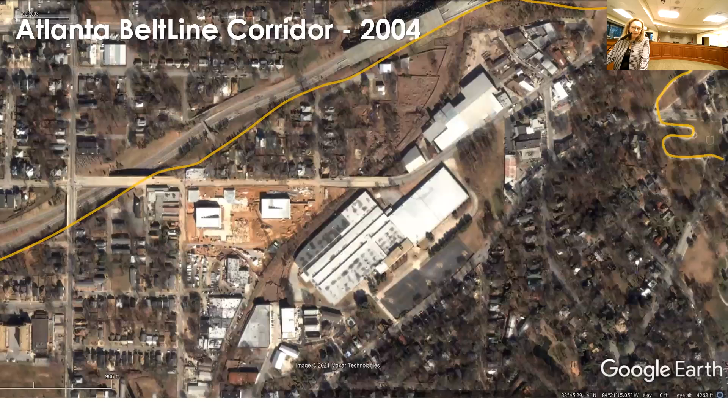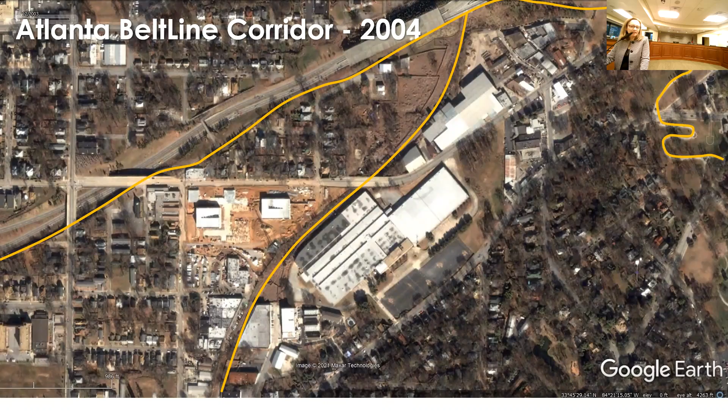Looking at the Atlanta Beltline's economic impact is a great example of what trails can bring. This is what it looked like in 2004, showing the existing trail to Stone Mountain, the Freedom Park portion of the Stone Mountain Trail, which was where the Beltline corridor was. Over time, the rundown areas became revitalized, bringing in needed tree canopy and becoming a linear park condition with destinations where people want to live, work, and play.

So that's a little bit of what the benefits are, providing the opportunity for public health, improving public health, getting out and exercising, biking, and walking.

One of the things we look at when building trails is we're building it for everyone's enjoyment - all ages, all races, all income levels, and all abilities. We really want everyone to be able to come and enjoy the trails that are going to be built here in Dunwoody.

And to also provide for those looking at it from a commuter perspective, especially with e-bikes now - how do we get you to the places you want to go, and how can you get there with ease from your home to those destinations?

As we started the plan here, our planning approach set a master planning goal. We worked with our working group to outline this goal. A few of the points are really connectivity - getting residents to key destinations, and doing it in a safe and inviting way. As we continue forward, that's the goal we're always reflecting back on: how do we get residents to key destinations, and how do we do it in a safe and inviting way?

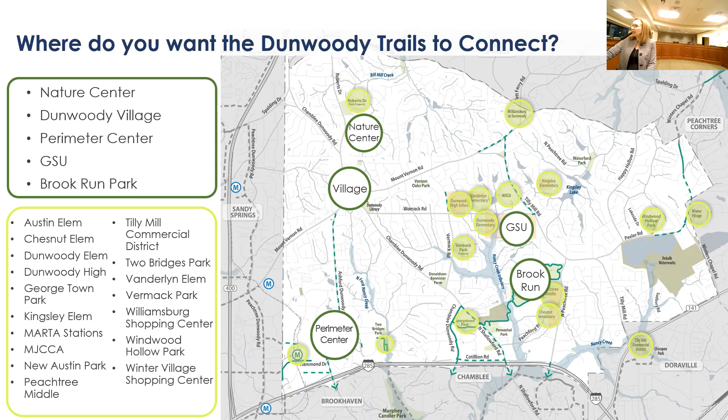So the tools - I like to call them our tools - that we have to do that: a lot of the pictures I shared early on, if we could find a greenway trail everywhere, we would do that. But in a built environment, you're not always going to find greenway trails, so we have to have other trail types within our arsenal to plan.

When we can't find greenway trails, then we're looking at side paths, which would be adjacent to some of your roadways. We might also be looking at buffered bike lanes or bike tracks. And then with the neighborhoods, we'll look at calming some of your neighborhood streets, making it more comfortable for you to walk and bike to get to the destinations you told us you wanted to go to.

As I talk through these types, I'll give you a little bit on each. I think the biggest takeaway with greenways is that they're separated from roads - they really are green space, capturing that space and getting out.

I love to look at these as almost a linear park experience. If we could take a linear park from Brook Run and connect it to all these destinations, that would be amazing - but unfortunately we can't. We do have some opportunities to use greenway connections, though, which really are the scenic, inviting, and safe trail experiences we're looking for. If we can't find those, we look at what other tools we have.

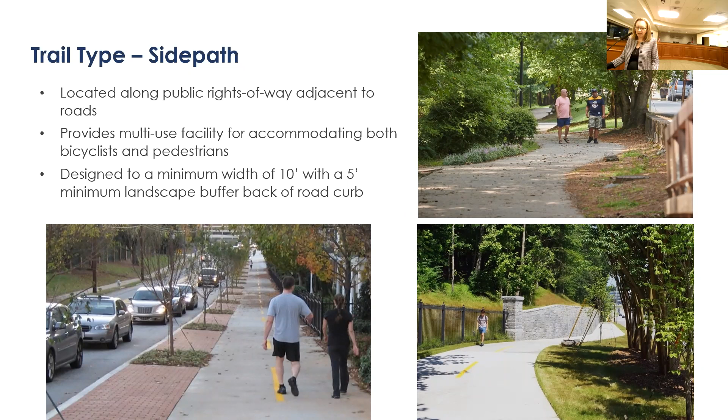Sometimes roads have too many driveways, so we can't put both bicyclists and pedestrians on one side. We have to go with the flow of the road and have a bike facility. If we have a one-way, we could put it together on one side to separate pedestrians on sidewalks from bikers on a cycle track. But when we have a lot of curb cuts, we'll separate it and might have it on both sides of the road.

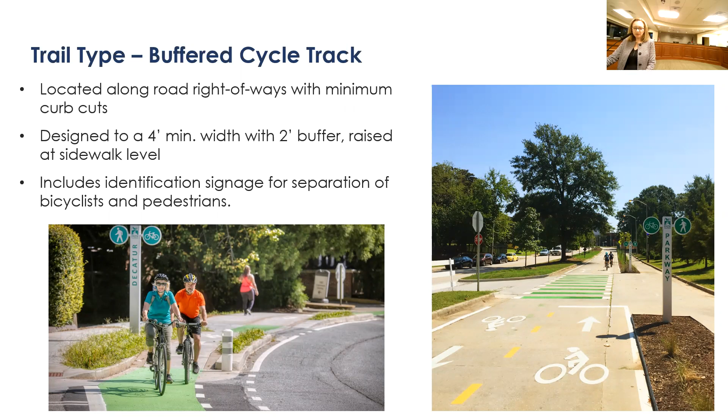That gives us another tool when looking at these connections and what we'd propose for trail opportunities in your city. Now, who here is comfortable on your neighborhood streets walking and biking? All we're going to do is look at how we work with you so that when calm streets need to be put in place, we can mark those streets where drivers know to expect more people walking or biking in the neighborhood.

To the left is how the street would be marked, so when you're driving you'd see that symbol showing bikers sharing the street with cars. We'll try to work with pedestrians being on a sidewalk if you already have one. If not, we'll work to put them safely on the street too. But how do we slow down local traffic and make that comfortable?

We're going to look at different types of calming measures that might be incorporated, but one of the tools, as Eric brought to our attention, is that you always have the speed limit, but who looks at that sign? You see it with vehicular traffic trying to slow them down—the flashing sign that tells you you're going over the speed limit. It's pretty remarkable, and that does slow people down.

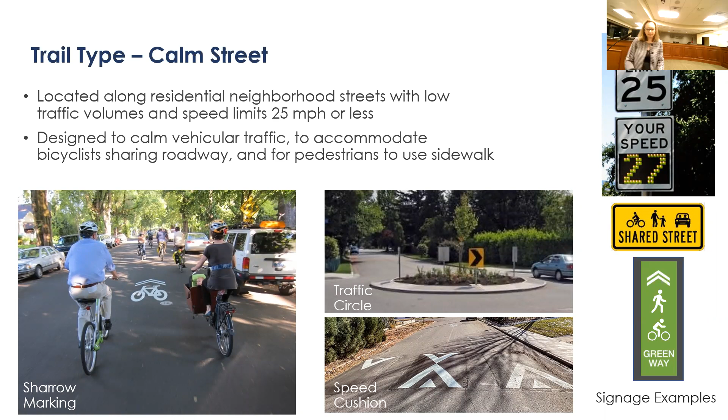All right, so to recap the public engagement and feedback we received: we started in November at the Light Up Dunwoody event, with an open tent where we met people with maps and saw where everybody lived and the destinations they wanted to reach. We followed that with a public open house at the beginning of December.

How many of you came to the public open house in December? Great. The input you gave us is a guiding factor toward what we'll present tonight. We also did a survey, which was open from December 7th to 30th.

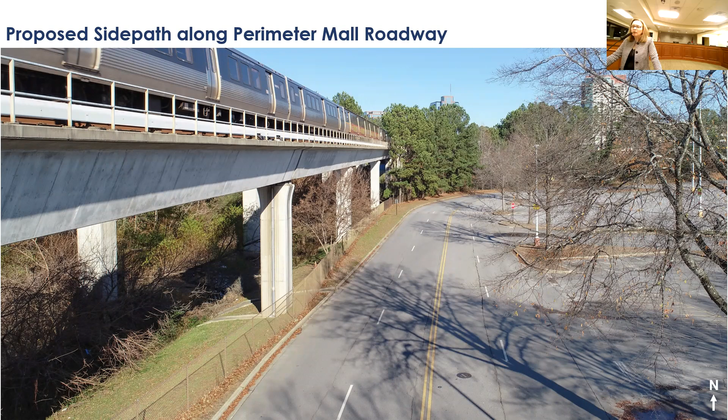On the back side of the mall, this is what it looks like right underneath MARTA. It really lends itself to a great opportunity whenever the mall redevelops, for the mall owner to do connectivity with a parallel trail along that lower MARTA area. This is a side path along the back driveway, but you can see that buffer and separation, that connectivity. You can even see what could be some public art and a plaza area. A wonderful opportunity to come along the backside of the mall, separated from the major roads within perimeter.

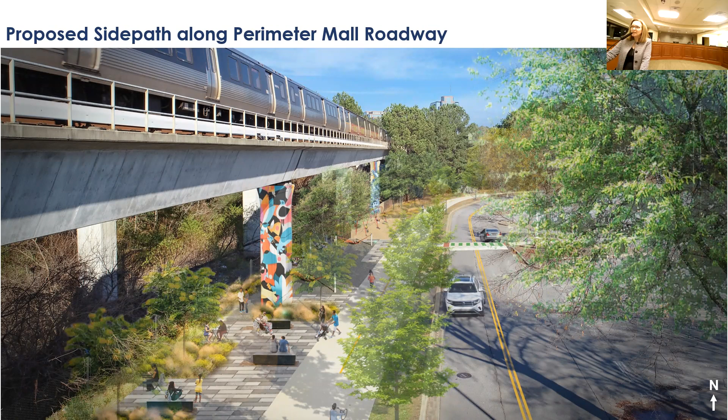As we travel north from there, you come to the Sandy Springs MARTA. We wanted to capture trail connectivity in a greenway fashion to get people to the MARTA station, and also utilize Mount Vernon Road for a side path that would come down and connect into what Sandy Springs is doing.

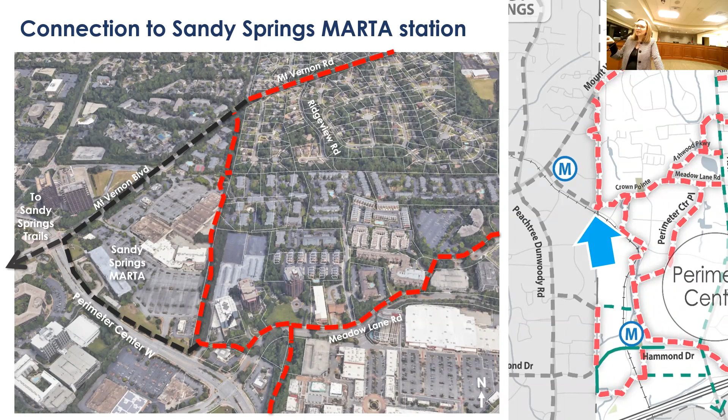It's hard to plan Dunwoody without looking at your neighbors, because each has their own plan. That's the way we work together. Where are the trails coming from Brookhaven? Where are they coming from Chamblee, Sandy Springs? How do we get all of this connectivity to happen?

As we come along the top end, right north of 285, there's Two Bridges Park. Is anybody enjoying Two Bridges Park right now? Let's get you better connected there.

Let's not make it a bridge to nowhere. Let's tie the community in. Let's get you safely where you don't feel you have to get in your car to get to the mall area. So these are some of the ideas we had.

Bringing in a calm street from the neighborhood, being able to utilize the North Fork of Nancy Creek as a greenway opportunity, and then connecting into the Ravinia Parkway. So that's a little bit of the vision we had there.

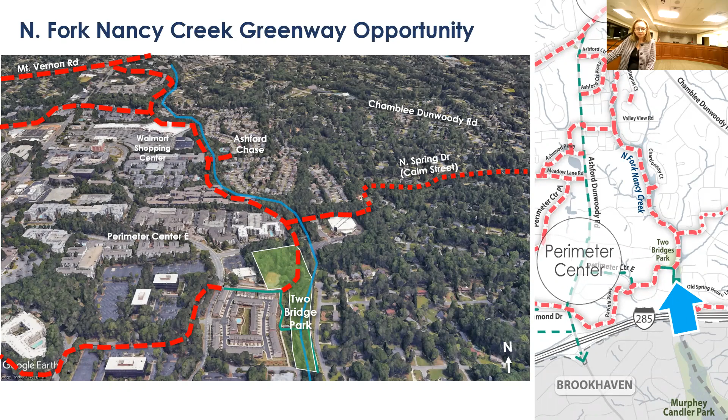As we go north of Perimeter, we're up at Womack Road. We heard that you really wanted connectivity to the schools, to be able to get to the schools, down to Perimeter, and up to Dunwoody Village. So we were looking for opportunities, and Womack is where we settled.

This is something we've done in different places. If you go downtown Decatur, we modified Commerce Drive and put in cycle tracks there. It's really been very successful for the community, such a walkable, bikeable place. That's really what they wanted, a little more safety for that younger generation.

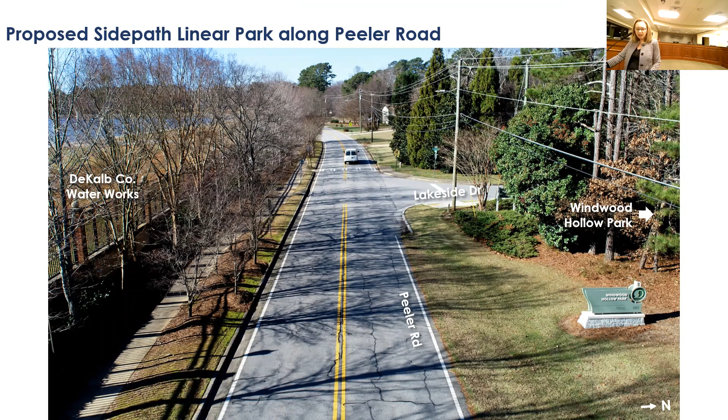The sidewalk today is not quite wide enough to accommodate bicyclists and pedestrians. So we've looked at how to modify that a little bit to adjust the roadway, to widen that sidewalk, and to bring back a tree canopy in that buffer to provide that vertical element, which is so critical on these side paths, to make you really realize you're protected from the roadway.

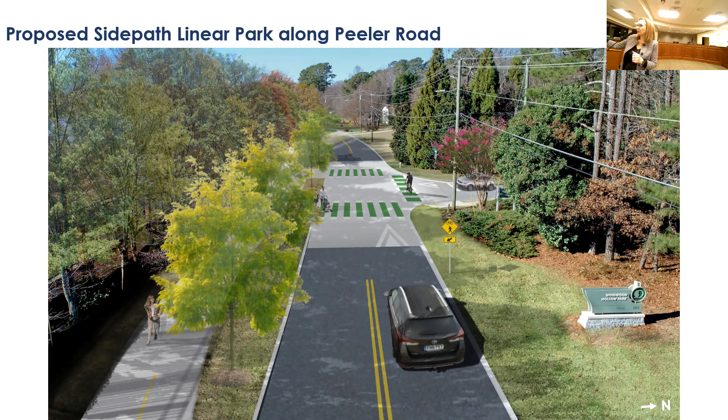Okay, as we're working back towards Brook Run, we're coming through the neighborhood. This was one of the routes we heard someone was already taking to get to Brook Run Park. It's a neighborhood street, already at a speed limit of 25 miles per hour. I'm sure people are going a little bit more than that.

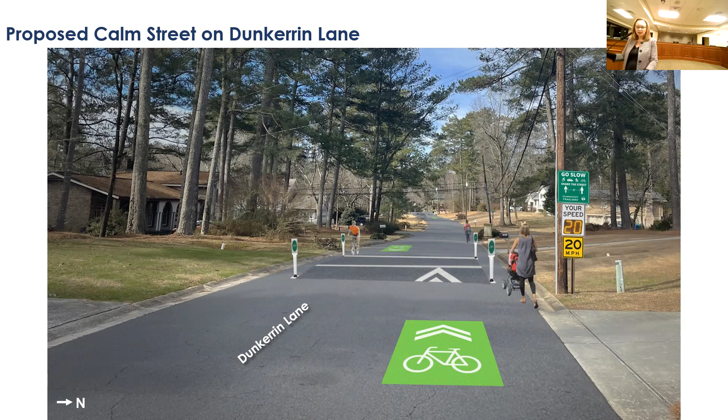So we took the liberty to give a vision of how we would control that, how we would calm that street. These are some of the measures we could do. You see the marking for bicyclists that would be sharing that street with vehicular cars. You see the signage. How do we get the cars to slow down?

Just to point out a few of these elements, as we work to put these in place, we'll work directly with each neighborhood to figure out what is best for your existing neighborhood street that's being proposed, and the best way to calm the traffic and make it more comfortable for you to walk and bike.

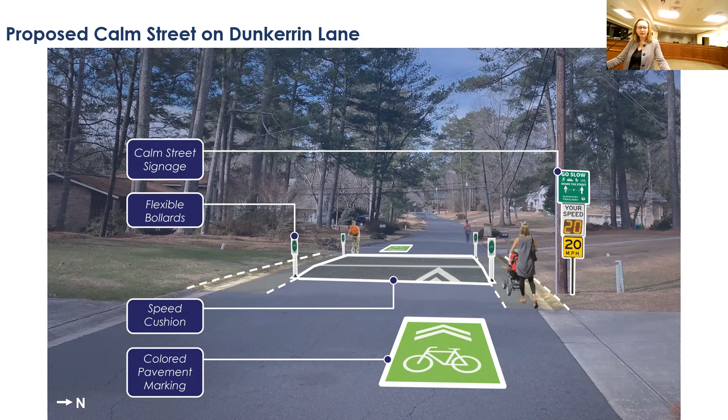Colored pavement marking, sometimes you can propose speed cushions, flexible bollards. We don't want those speed cushions to interrupt the bicyclists and pedestrians, so we pull those in, but mark the edge of that. And then again, the signage.

All right, so let's go down to your neighbor. Your city limits bridge over 285, and in doing that, you touch Chamblee. But how do you get to Chamblee, and how do we have really good connectivity that would be inviting for 60% of your population to want to use this?

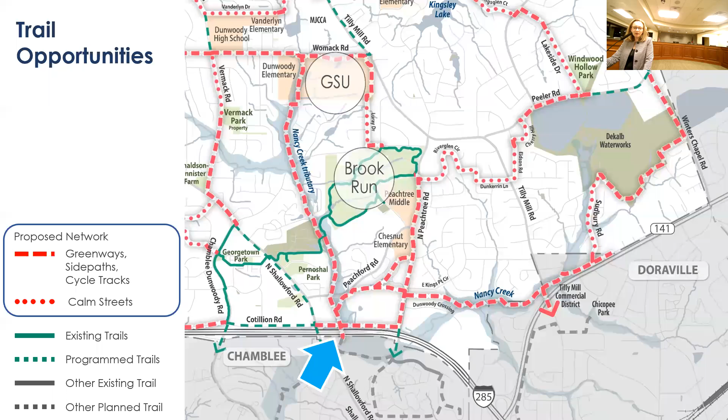So we're looking at Nancy Creek, which currently is piped under 285. To the right here of this graphic, all of that green space is park space that City of Chamblee has purchased. They're going to develop that into a wonderful linear park. When you look at this connection, it ties your park at Brook Run to Chamblee's park that'll be there. Chamblee is actually looking for a greenway that would go from there all the way down to Chamblee Plaza at Peachtree Industrial. So you start to see how this connection makes a strong link for communities that are divided by that barrier of 285.

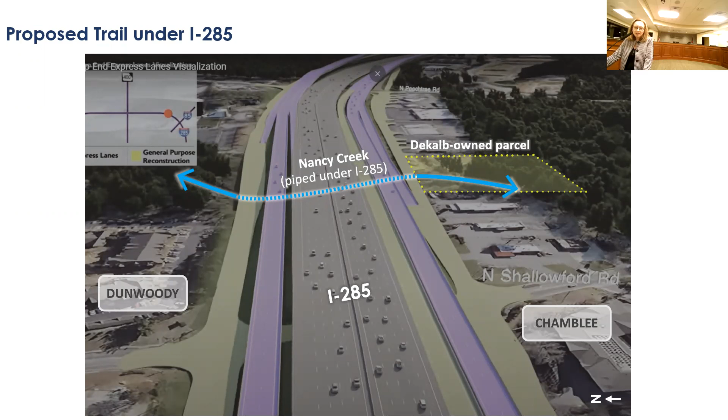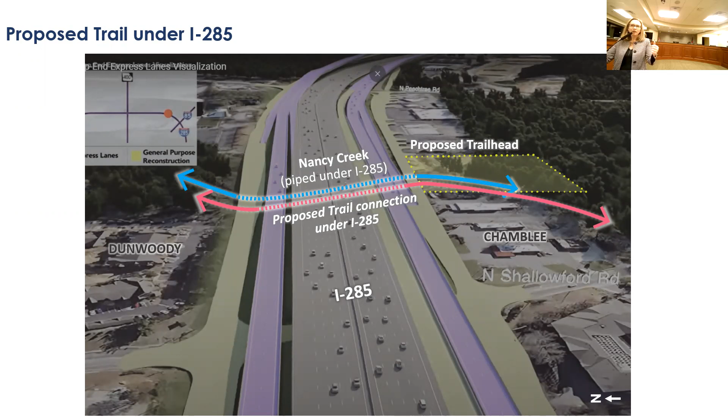So the concept here is to have the trail follow the creek, but the creek is in a pipe. This graphic is also conveying those elevated lanes being proposed, and what GDOT is going to do there in the future. To me, that's not beneficial for the local community to be connected. So what we're proposing is to have 285 open cut to bridge over, daylighting the creek, creating a greenway, and having the trail connect.

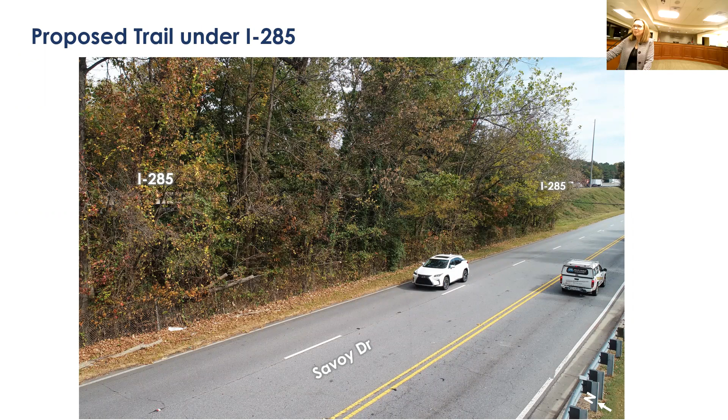Today, on the inside of the perimeter on Savoy Drive, you have no idea the creek is even there. It's in a pipe, unfortunately just impacted by putting it under the highway. So how could we open that up, daylight the creek, create the trail connection, and actually have the openness that would be inviting for the trail connection from one side to the other? That's what we're proposing.

All right, so let's go a little bit north here. Okay, so we're going to go over to the Happy Hollow Road area. Again, this is calm streets. There is some greenway connectivity. We're looking at the park space, connecting to the park space, being able to interact, come through the utility corridor and really provide neighborhood connectivity here.

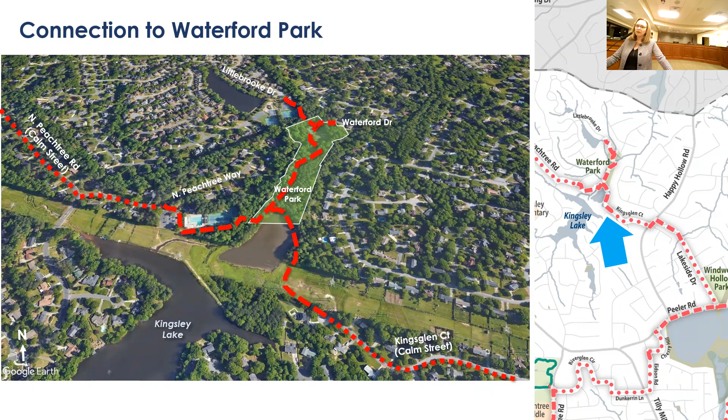And then we'll come over to Tilly Mill. So Tilly Mill was one of your projects that was already programmed, kind of underway.

I think it was good timing for us doing the master plan, because we've been able to work with your city staff and really analyze what would be quality, what would meet the goals of the trail plan, what really brings a quality trail to Tilly Mill, and where Tilly Mill is needed for connectivity to destinations. So you have the school campuses, and the Williamsburg at Dunwoody shopping center. Those were areas we heard people would want to walk or bike to. So we really looked at Tilly Mill in between those two areas.

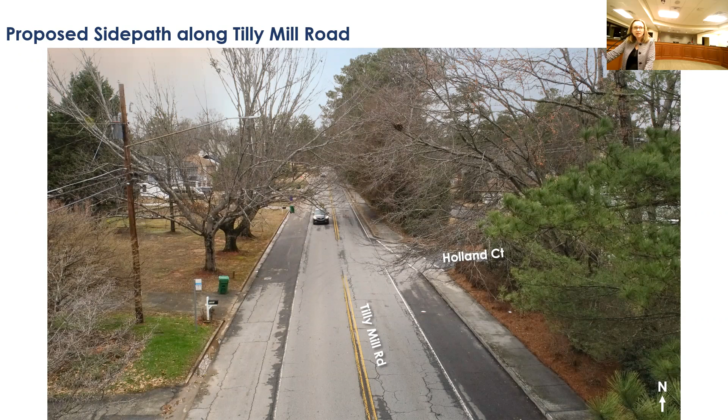As we continued a little bit north on Tilly Mill, this was kind of the cross section. Like any roadway, your cross section varies every 100 feet. So we're looking here at how do we slide what today is your travel lanes - you have 2 lanes of travel, right in the middle, and then wasted area. But how do we use that and still do a quality side path that addressed the concerns we were hearing? So this was a little bit of what we saw - just shift that road over, be able to really have the extra width that was in the road for the side path.

But what is critical here again is that green space buffer. We do not want that side path trail right back of a curb - that doesn't meet the goals of the trail master plan. We want trees planted there. We want you to have shade as a trail user. We want you to have that vertical element that really is a protective element when you have traffic beside you.

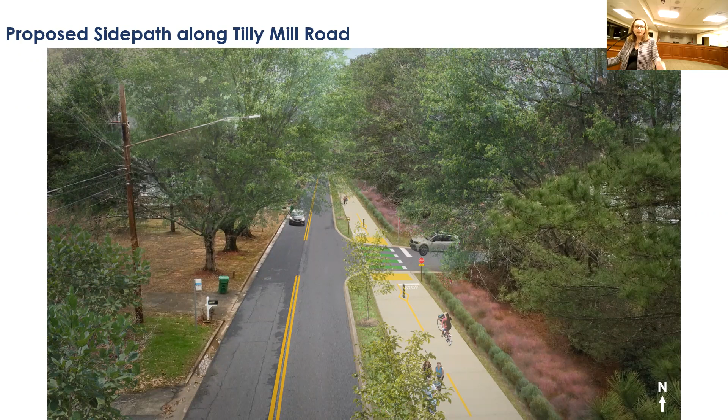And this is an area too - if you live here in this area, give us your feedback. Where are you walking? Where are you biking now? How are you interacting through your neighborhoods? We heard a lot of people were using the neighborhood streets as their kids were coming down to Mount Vernon and being able to get to the schools. So really figuring out that calm street and that connectivity from the backside of the Nature Center.

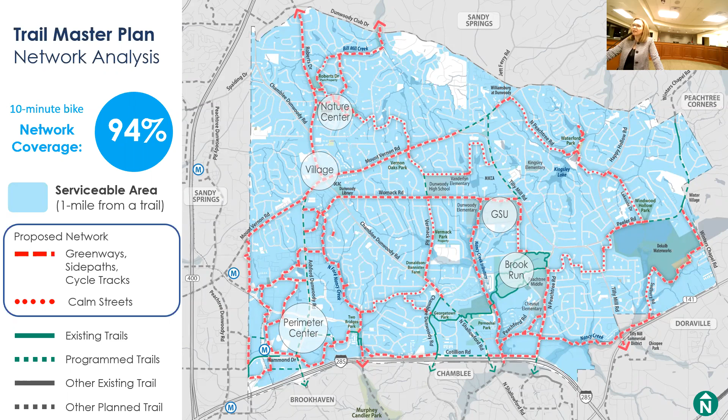And especially today with everybody really starting to look at e-bikes and getting to and from work from your home, how do we get that coverage? So we're at 94% when you look at a bicyclist distance, a 10-minute distance.

All right, so I hope that excited you for the opportunities that we have found. Our next steps - tonight we're going to open this up and get some additional feedback. You've got comment cards, we'll continue collecting feedback.

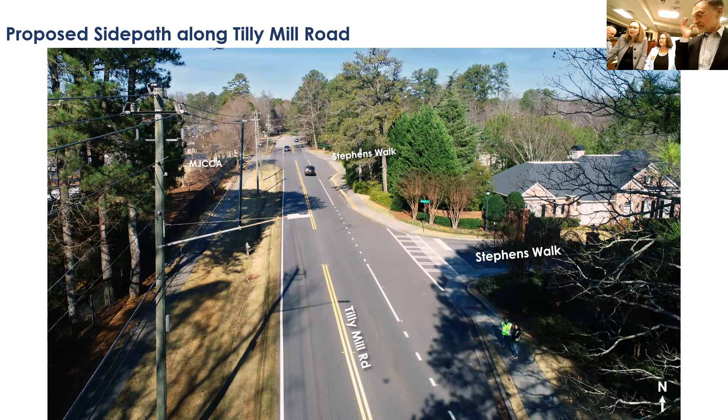I understand that there was a lot of commotion coming into this master plan, regarding whether it was not clear communication, maybe not a good understanding. But as we continue with the master plan, we'll look at where do we start, where do we go. We want you to get to the places that you want to get to. And I think the mayor's wanting to say something.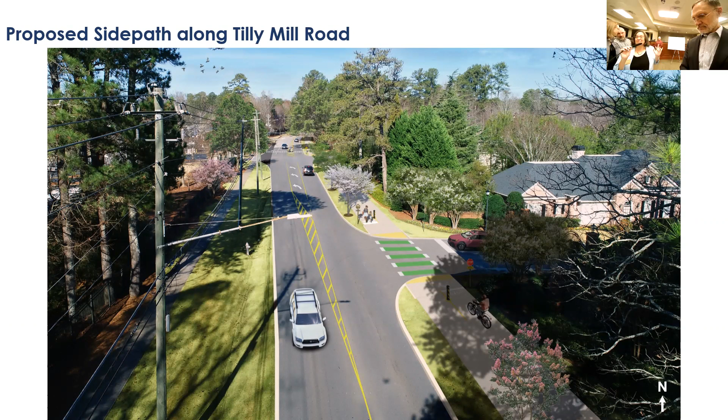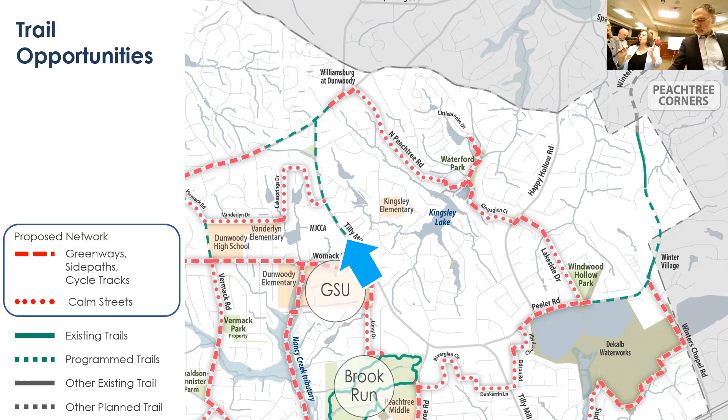So it is clear and not new news that we have concerns about a path on Tilly Mill. We hear you. If I took a vote today in this room, Tilly Mill would not be the first choice. But we need to know what is the thing where you think we should improve, build, or develop trails. We're going to do a model trail thing. We're going to do one.

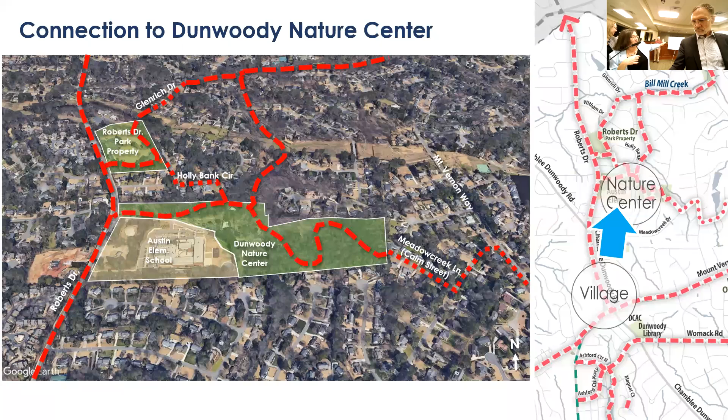We don't have the money to do all this today, tomorrow, or next week. And so you have a lot of concerns about Tilly Mill. We hear you, we totally hear you, and we will continue to work with y'all on these concerns. But in the meantime, for this meeting to have value to the community, it would be really helpful if you would give input on where you think there is an opportunity for us to make a difference in our trail and path system for people who are interested in using them. They'll still answer questions, but if you could just provide us with that little nugget of information, it would be really helpful. Thank you.

I'm Clark Glenn, and I live at the end of North Springs Drive, my wife and I. And I think this could have been a very good idea about 35 or 40 years ago, because property all around the Dunwoody area, if you look around, there really isn't any more property available. But at some point, 35 or 40 years ago, there was a lot of property available.

Now, our home is built on a lot that it was the only home in that development that would fit on the lot. And after the home was built, then about 40% of the deck had to be cut off because it was too close to the creek. Now, our property jumps over the creek, and there is about another 10 to 15, maybe 20 feet in some areas on the other side of the creek. But that property over there is not usable by us.

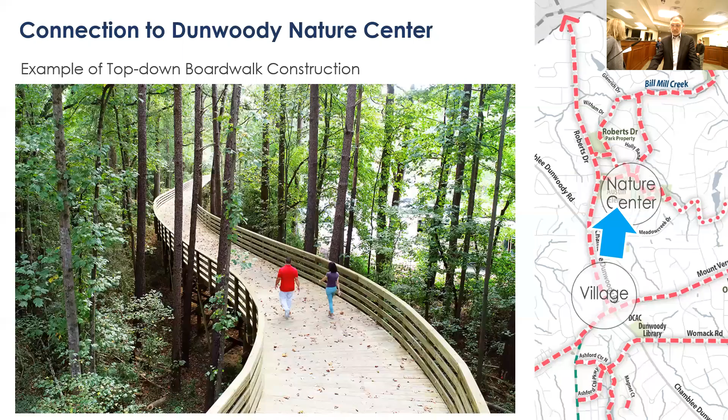Good evening. The way I see it, we're going from the right fork, going down Tilly Mill to Womack, am I correct? Then we're going through the college. If I may ask, you're leaving something out. You insinuate you want people to get to the park safely. How do you get them across Womack at Tilly Mill safely to the other side of the street?

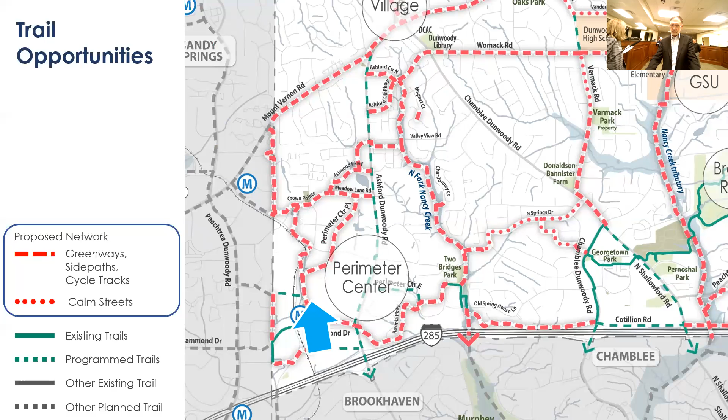So Womack, can you answer that? You built the path on the wrong side of the road in the first place. You have to go across a major intersection to get to the college entrance. Am I correct? Yes, you are correct, those are busy streets. So what are your intentions, to build a bridge or something?

No, there will be an at-grade crossing. Are you going to stand a cop there all the time? No, there will be an at-grade crossing at the intersection, meaning there's no extra structure. There is a well-lit area with a pedestrian crossing. You're setting people up to be hurt crossing that major intersection. Well, people cross the intersection today. So what you're building is set up to bring traffic down this path, bicycles and pedestrians. Correct.

Well, this is a master plan. We have not decided what side of the road, but we decided to put this on the east side. It was originally planned for the west side.

That would have been more logical if you intend to go through the college. So when you look at all the residents on the east side that would come down Tilly Mill, one point of crossing Tilly Mill is what we're proposing.

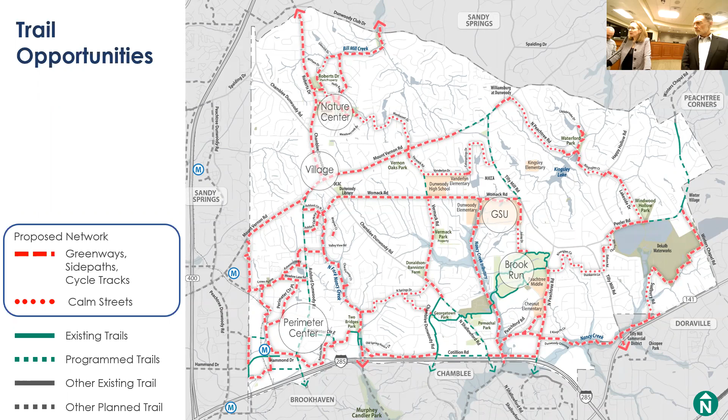Good questions. So what we would do is work directly with the Nature Center. Some of the trails there followed that very sensitive approach to construction that we presented. It allows us to intertwine with the old growth forest, the specimen trees, to preserve those, to almost have those within your reach, because it's a top-down construction where you drive just piles, and any tree determined as needing to be removed, we would also work to plant back. The top-down construction would leave all the roots in place. We don't want soil disturbance. Usually if a tree is removed, it would be cut right above grade so that we could build as we go and go through there with a canopy walk. But I do hear your concerns, and when we get to that point in design, we would work hand in hand with you all at the Nature Center.